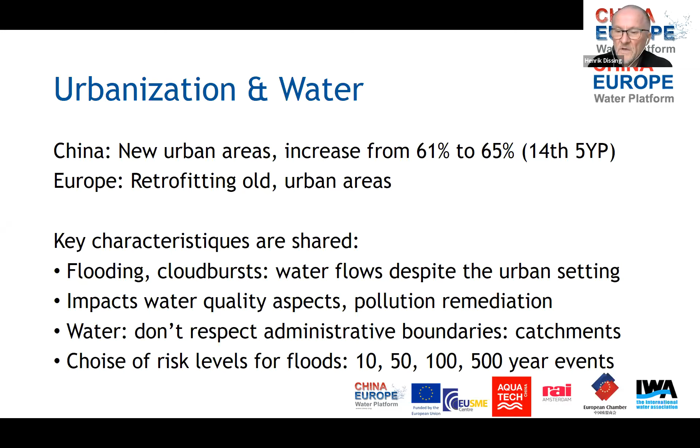The third thing is water doesn't respect administrative boundaries. It comes from the entire catchment. It goes across provinces, district, or city boundaries. And finally, an important detail is whether it's in new or old settings, you still have the very difficult choice of getting the risk level right. Should it be 10-year events, 50, 100, 500, or even 1,000-year events you will have to deal with?

We will come through a number of presentations. We will end up with a roundtable and some of the questions for discussion. Some of the questions for discussion are quite simple. Do we have solutions which are sufficient on all parameters to deal with the challenges we're facing and to cover the benefits which are also part of the coin? What do we do to cover all related water management challenges? And here again, I'm thinking about how dealing with flooding matters will eventually also have a huge water quality aspect.

What to do with having solutions which can be scaled up, where it's not a matter of projects and special efforts, but something which is handled in a manner where all cities eventually, because most cities are subject to flood risk, will take this on board in an operational manner. Not only the largest cities with millions of inhabitants, but also when we get to tier 4, 5, 6, whatever. And when it comes to financing, how to find mechanisms for this which are not just based on grants and government budgets, but which are somehow a more organic way of financing and economics.

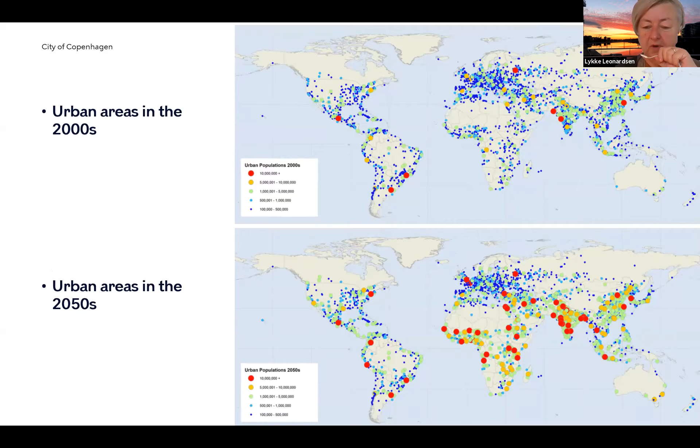But you also see that a lot of these cities are at extreme risk for growing heat in the city. That is a challenge to many. There's also a risk in many cities for water availability, actually not having sufficient amounts of drinking water. And a lot of cities are also at risk for coastal flooding. And in the project I'm working on at the moment, we are also looking at the risk of inland flooding, but I don't have any illustrations of that as yet. But it is also a problem that many cities will face in the future.

So cities need a joint voice to raise these issues on a global scale. And C40 or ICLEI can be that voice. I mean, there are lots of climate negotiations and finance issues taken at UN level or at national level. But it's the cities that actually have to implement the solutions, and they're the ones with a direct responsibility towards the citizens and the safety and economic situation of their citizens.

So an organization like C40, we are working at two levels. We have the global policy levels, looking and trying to raise the voice of cities on a global scale. What are the climate change related challenges that cities are facing? What needs to be done in order to assist cities in overcoming this issue?

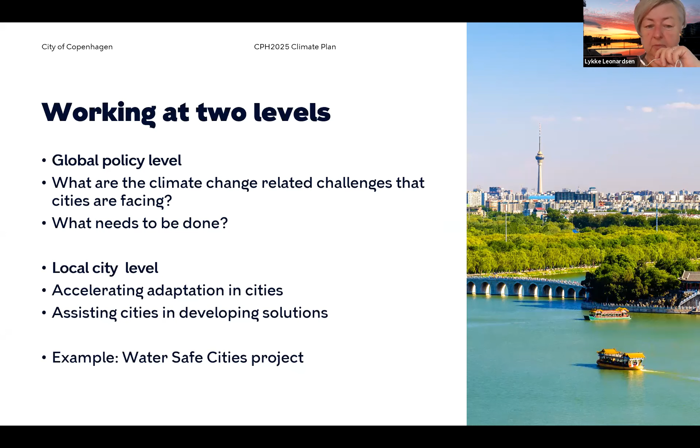But we are also working at the local city level on accelerating adaptation in cities and assisting cities in developing solutions. And one of those examples is actually the Water Safe Cities project that I'm working on, where we are offering assistance to a number of C40 cities on water-related climate change challenges. Because a lot of cities are facing the same issues, and we do not all need to invent the wheel. We can learn from each other.

And that's why an organization like C40 plays a major role in accelerating climate change adaptation on the city level, simply by sharing solutions. Solutions that fit in Copenhagen might also fit cities in China or cities in India if they are adapted to the local level where they are going to be implemented.

And another thing that an organization like C40 can also assist on is overcoming barriers. As Henrik mentioned in his introduction, adaptation has to take place at a local regional level. We need data. We have financing and insurance being an issue, and we need a lot of innovation to move forward.

And if you look at it from the top, saying local versus national level, there's no such thing as administrative boundaries when it comes to climate change. Water flows where it wants to flow, heat spreads where it spreads, and it doesn't have anything to do with whether you are in one municipality or another. So local problems very often call for at least a regional solution, maybe even a national one.

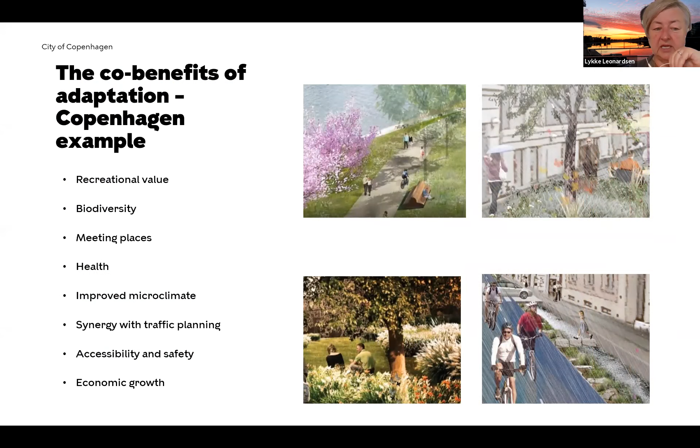So what we are looking at in the future is what I call transformative adaptation. And it's a type of adaptation where you're not just looking at solving the climate change adaptation issue, but actually transforming the city, contributing to other goals. That could be on greenhouse gas emissions, social equity and biodiversity, the environment, mobility, and housing. But it needs a strong focus and a lot of coordination in the planning and implementation phase.

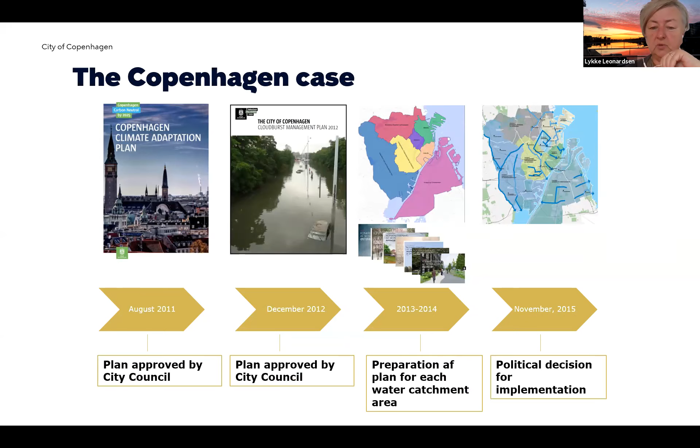We have tried doing that on our cloudburst management plan in Copenhagen. I will not go through this, just show that over a 4-year period, we went from just having the first plan into actual implementation. And we are dealing with 2 main risks, and in this plan, focusing on one, that is the risk of heavy rains, heavy cloudbursts, but we are also in the future looking towards rising sea levels being a risk.

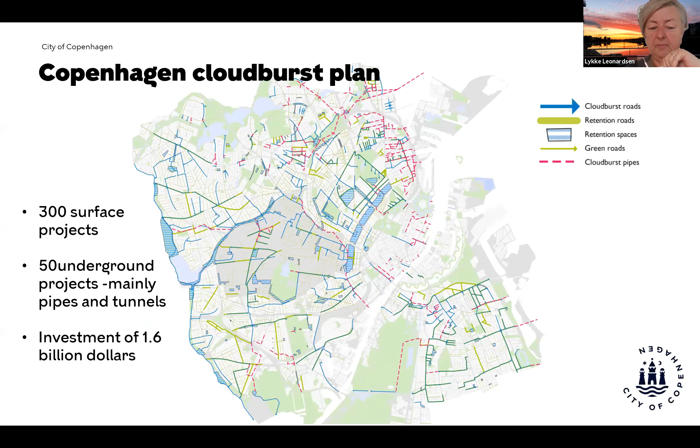Our cloudburst plan has 300 surface projects, and it will transform the city completely over the next 20-year period, and is also the backbone of a lot of our urban development in the city. And it's not just the future for us. We had a huge cloudburst in 2011 that cost us an awful lot of money, $1 billion in damages, but it also gave an image of how the future can be, and it underlined the need for action here and now.

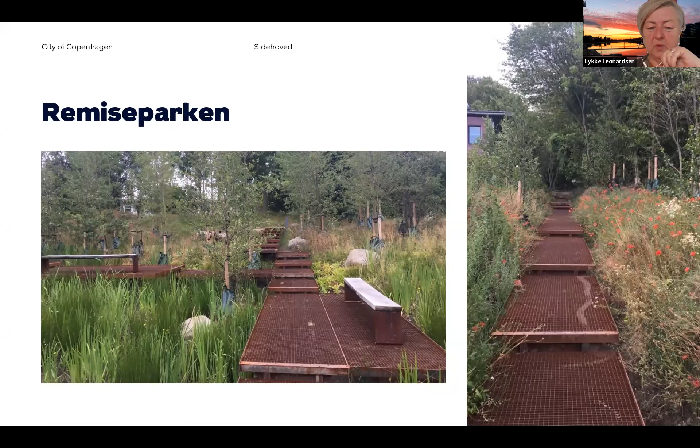At the end, I'll just show you a few examples of projects that we have implemented. This is St. Kjeld's Square, where we have doubled the permeable surface, planted 600 trees, and it's all of a sudden become a green living area in the city of Copenhagen. Skandiagade, and a park where we will use the entire park as a flooding area to hold back stormwater in case of heavy rains. And Remiseparken, also a project. And all of these are actually in areas where there are also social issues, so they're also helping improve the local neighborhood. Thank you so much.

Thank you very much, Lykke, for this comprehensive, fast-forward covering of the climate change adaptation globally and in Copenhagen.

While we're waiting for Chen Lichun to be ready, just one question, Lykke: how many members does C40 have in China? I don't have the exact number, but there's a growing number of C40 cities in China, including major cities like Guangzhou, Hong Kong, Shenzhen, Beijing, and Shanghai. I can check it up and post it in the chat later.

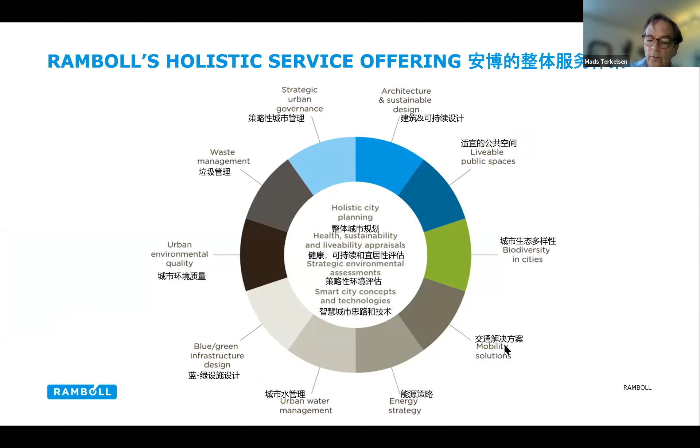Our typical topics that we work with are classical engineering topics like buildings, transport, energy, environment, water, planning, and urban design, and we also have management consulting. We try always, when we start a task, to combine all the different expertises into holistic and integrated solutions. That was how we entered this urban blue-green market, so to say. We started to combine, every time we had a project - either wastewater, water, flooding, landscape architecture - all the different topics into these projects.

We started out in Denmark, and from Denmark we took this and some other international projects as well. With the help and support of the China-Europe Water Platform and also the Sino-Danish bilateral cooperation, we were able to bring our projects and products to China, working with the Chinese, who are very innovative, and introduced for example the sponge city concept. We were able to increase our market share internationally after being in China. We are still in China and growing in China, but we are growing because of the projects in China, and we are growing very much in the rest of the world as well. That actually comes down a lot to the China-Europe Water Platform, because when we moved out to the market in China, they were already informed on the basics of the concepts, so we didn't have to start from scratch. They had quite a lot of knowledge when we talked to the stakeholders, so we could fast target the real issues and problems.

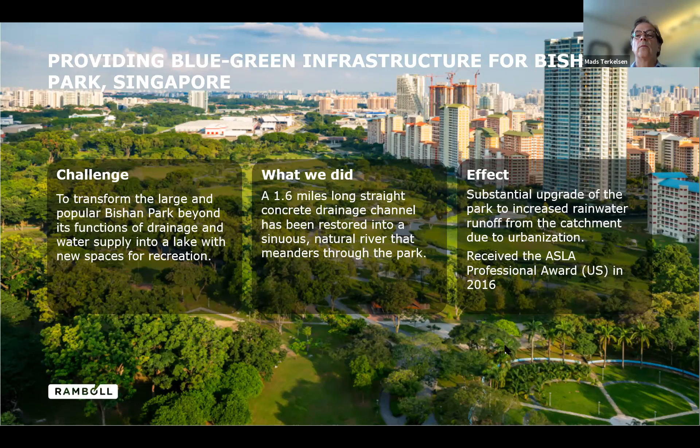We also worked abroad, and I have one example, because Copenhagen is not relevant maybe for Beijing, but this project is more relevant - we applied some of our technologies from our Danish project into a large project in Singapore, which is actually very similar to how we see things in China as well.

This project was a park with a flooding canal in the middle, and the water in the canal, in the lower picture, was black odor water. So what we did was remove the canal and make a larger depression, so the capacity for handling flood water was increased, and at the same time we applied natural wetland systems and root zone treatment systems, so we could maintain high water quality so people could actually use the water. We installed mobility features and activities, creating this area space that increased the value for the neighborhood immensely, and also the prices of the houses around went up.

And then this is just one example from China that we did. This is based, among other things, on the contacts we got through the China Water Platform and the Sino-Danish cooperation, and also being able to present especially the case that I just showed you from Singapore. This is a cultural park in Tianjin.

The thing here is that they wanted a park that was not at risk of flooding, because there have been flooding events in Tianjin, so it's a known risk in the area. So we made this park, including a lake and some green areas, also some mobility paths for light users, like pedestrians and maybe some bikes as well.

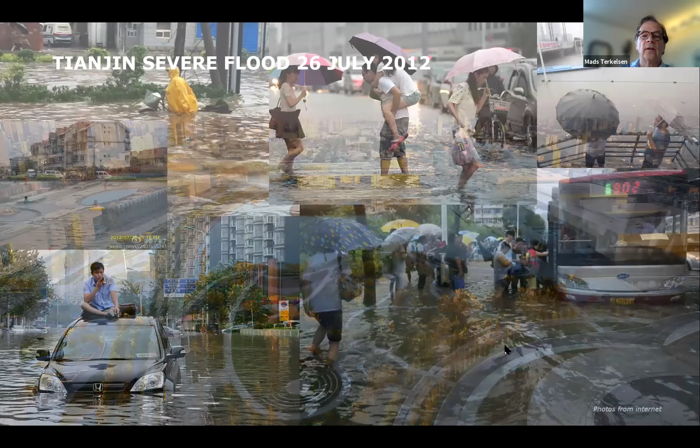And we made it so that it could take care of the flooding, but also served a lot of other purposes, including recreational areas and transport. This is an example from 2012, where the rest of Beijing and Tianjin looked like this, but in the park area it looked like this. This is sort of a proof of concept, and it's not even reached the maximum level yet, and it's not nearly reaching the construction and the houses around.

Working with China put on some extra layers, because Chinese authorities and the government are very innovative in their approach to solving problems, and we really benefited from that. We of course work with water quality, water scarcity, flooding, urban design, landscape architecture, recreational areas, mobility, activities, local microclimate, all values.

And then we really benefited from the sponge city concept as well, which is actually more or less the same thing, but explained in a clearer way. It's a good way of explaining it, and we brought that further out internationally.

And this next project has nothing to do with China. It's a totally different setting. It's from a poor country in Western Africa. But the reason I bring it up is this is what we work with. We started in December last year, so we are working on this now, and this is exactly the same kind of project.

It's a drain that fills up with waste and gets blocked, so it doesn't work as a flooding canal. So we change it, and we use all these different expertises and combine them into this solution.

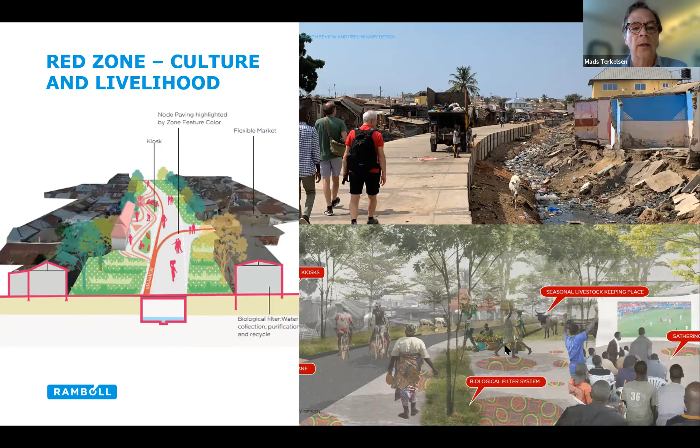So these were my words. Thank you very much.

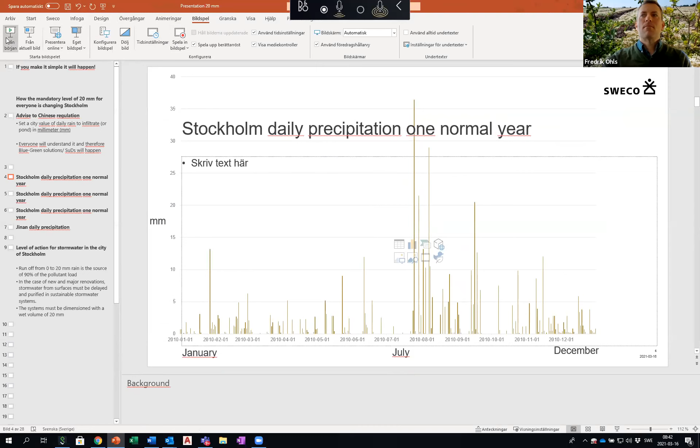It's not a problem, this I've already told you about, you make it simple. Runoff is pollution, you remember? And this is Stockholm daily precipitation, one normal year.

Do you see my screen now? Yes, we see your screen, good, perfect.

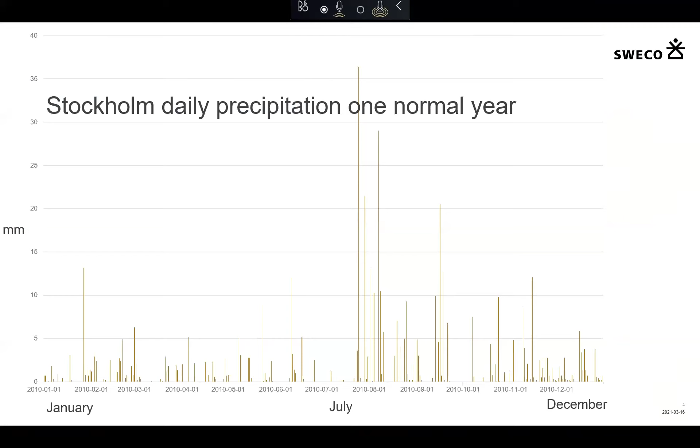January to December. And 20 millimeter is 90% of the annual runoff volume in Stockholm. This is unique for every city, so you just calculate that for your city. And then you will know - this is a coincidence, but this is 90% of the annual pollutants in Stockholm if you infiltrate it.

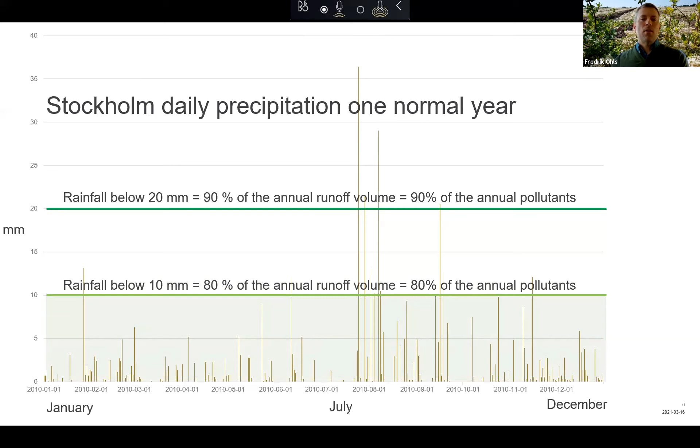You can also choose 10, to have 10 millimeter in Stockholm will be 80% of the annual pollutants. And then we implement it into blue-green infiltration that will bring us even cleaner water in the future when our city is growing very fast - okay, not so fast as in China, but one of the fastest growing cities in Europe.

So this is what we call the level of action for stormwater. And everybody knows it - every private property owner, the municipality, every actor in the building process in Stockholm.

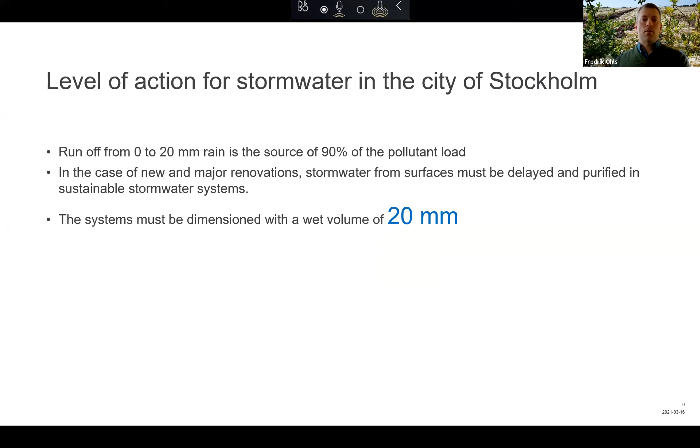So here we have some examples. This is after this level of action. As a private property owner, you know you need to take care of 20 millimeters. So then you get a lot of green roofs, you get a lot of green courtyards, looking like this. And like this.

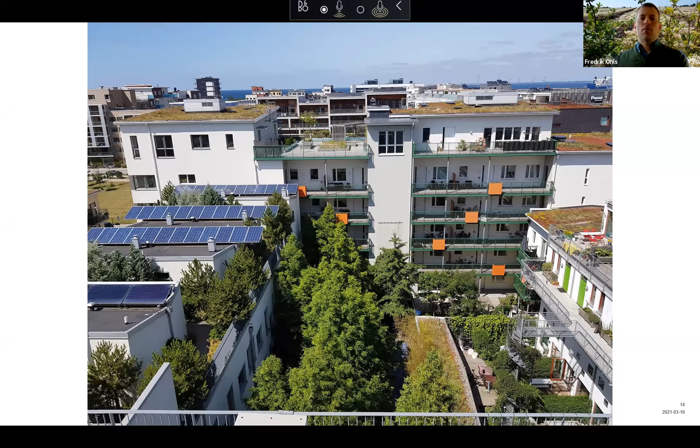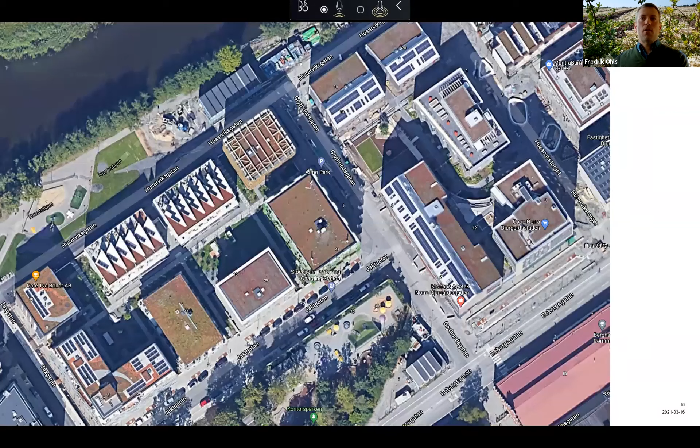And this is not only for the property owners, it's also for the municipality or the pavement. You need to take care of 20 millimeter of rain. So you take the 20 millimeter times the hard top area and maybe a little reduction factor, and then you store it in rain gardens, trees, structural soils, and dry ponds. This level of action, 20 millimeter, is now making a revolution in Stockholm, because you need to do these kind of local decentralized solutions everywhere.

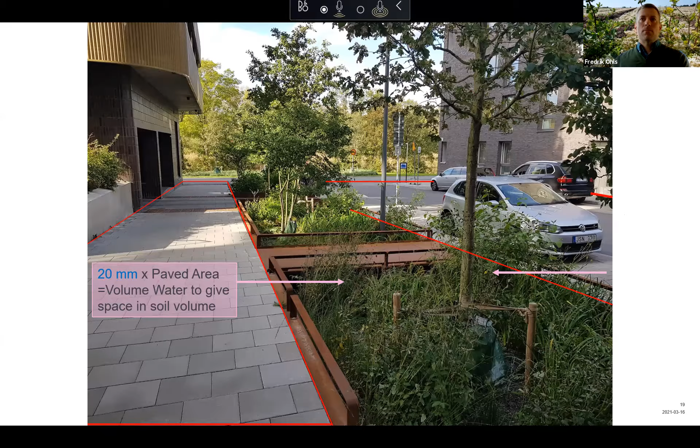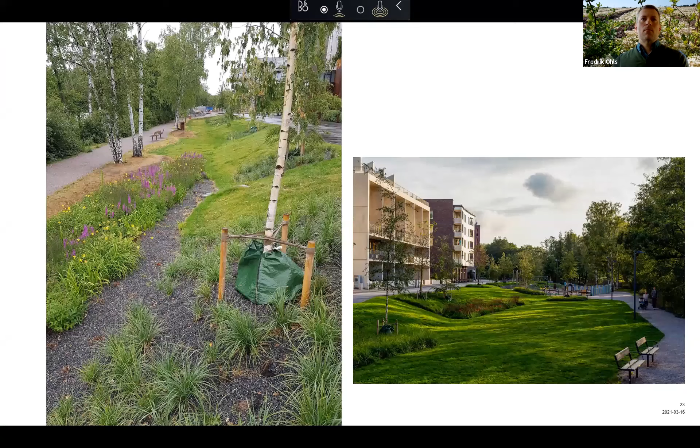So my advice is to calculate the millimeter value - it's something about 10 to 25 millimeter. Stick to it, advertise, implement, and follow up. And I know in China you have annual total runoff control rate, but as far as I see it, it's too complicated for us consultants. When we come to a new project, we don't know what the limit is. Just give us a millimeter and we will make it blue-green.

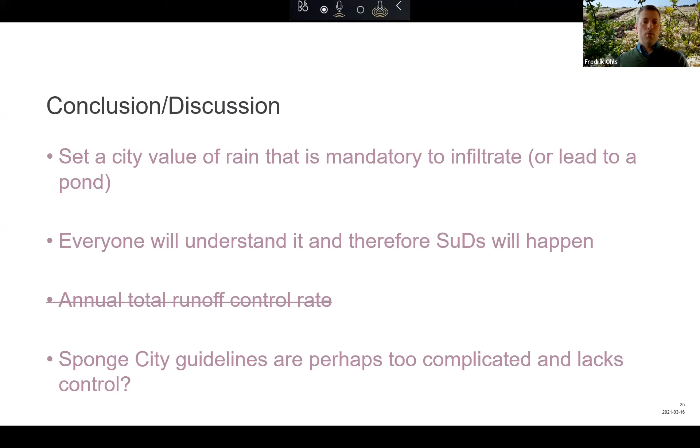Thank you, and that was everything from my presentation.

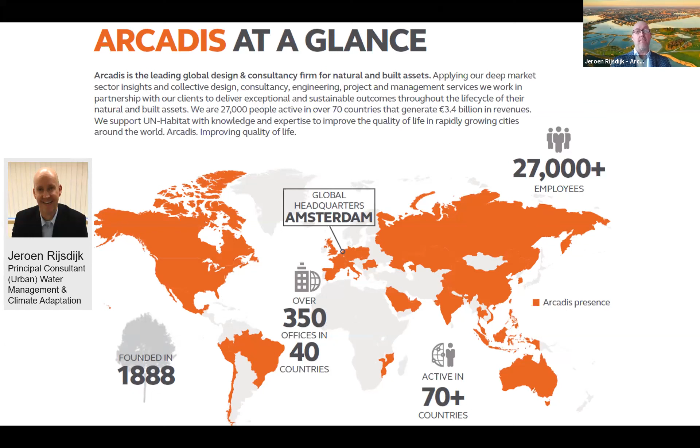My name is Jeroen Rijsdijk. I work at Arcadis, a global design and consultancy firm with a presence in over 40 countries, active in 70 countries, and also very active in China. I've been in China myself 12 times in the past 5 years, and most of my time I spent in the city of Wuhan.

Arcadis has a big presence, and we have our mission statement, which is about improving the quality of life. We've been working on that since 1888, and a lot of other companies joined Arcadis in the last decades. So we've become a big global firm working on all sorts of nice projects.

One of those nice projects I want to elaborate on is the project we did in Wuhan for a local project developer, which was developing the Hankou Commercial International Business District, also known as RG27. This area of approximately 3 square kilometers had a really high ambition about developing.

Here you see some images from the architects. They had a really high ambition, but also a lot of difficulties to address. They were situated at the waterfront of the Yangtze River. It was a flat area with low soil infiltration possibilities, intense underground buildings, and very hard conditions for the Sponge City program.

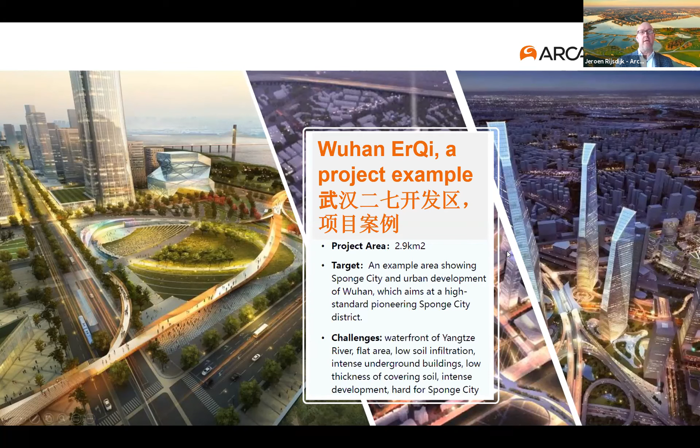So we helped this project developer make a couple of plans to implement the Sponge City ideas into this development. We made a Sponge City master planning, a Sponge City general planning, a specialized planning, a design guideline, and we also did assessments on projects that were already designed.

The idea of this was to help the designers, the local architects, the landscapers, translate all these Sponge City ideas towards a Sponge City design.

And we also added something extra. That extra was that we looked beyond Sponge City criteria and looked at how to make the area also climate resilient, because Sponge City only sets targets for a certain amount of water capture.

And it will always rain more extreme than that at some point. So what do you do if you build your Sponge City area and the event that occurs is more extreme than your Sponge City criteria?

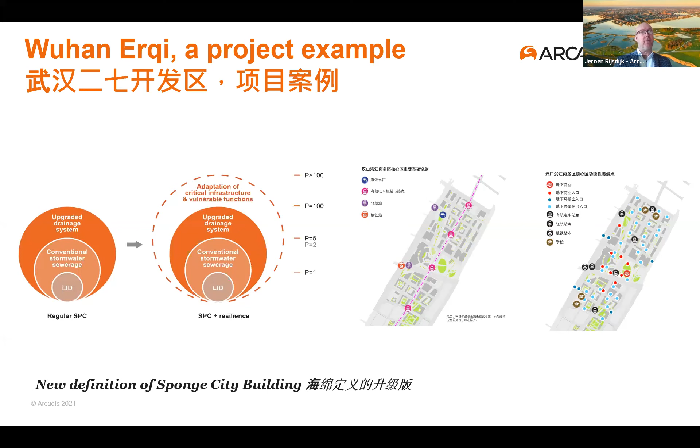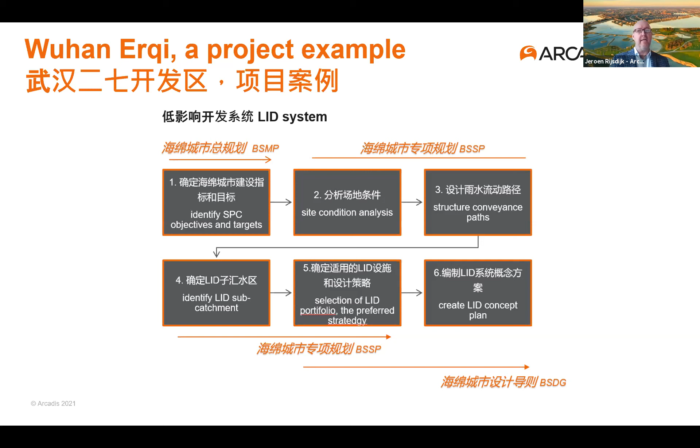But we also introduced the resiliency system. With the resiliency system, we looked at totally different types of measures for making the area climate resilient for the really extreme events.

And of course, these really extreme events happen in Wuhan just as they happen in other cities. Being resilient doesn't mean there will be no more flooding, but it stands for the ability to minimize the damage and maximize the efficiency of recovery. That's really the idea that we implemented.

And of course, in China, you have to defend your reports to an expert board, an expert panel. The experts from the universities and from Beijing really understood that yes, you have to do this as well, on top of Sponge City.

So what we did in implementing all these reports and this way of working, we also did some cost benefits analysis on the performance of different types of measures, helping to make it more clear for the local design group how to make their designs.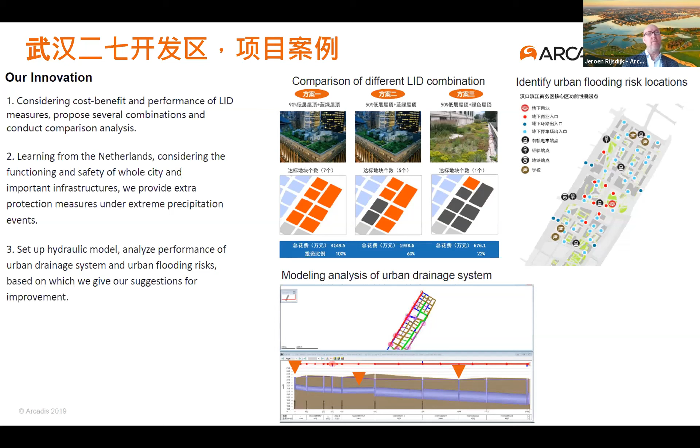Okay, thank you. And the last part was that we also made the hydraulic simulations to help the design groups to make the right decisions. And here's an area where we looked at the Central Park, and in the Central Park, we helped to translate again all these criteria into the design criteria and helping them with the self-assessment and the government assessment.

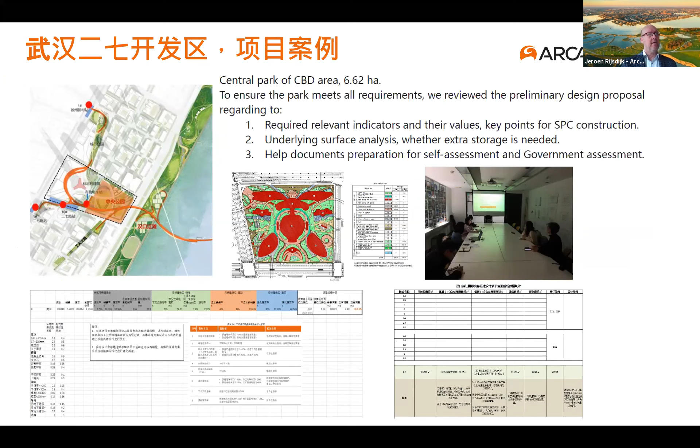So this was really a nice adventure in helping the local design group, the local project developer, in implementing this ambitious planning. So thank you for your attention.

Thank you very much, Jeroen. What I heard you say was that if the official sponge city criteria had been followed, then the damages of a huge cloudburst or flood event would have been quite severe. Is that correct? Yes, of course, because the sponge city criteria only captures a relatively small amount of rainfall.

And if you look at an extreme event that would occur maybe once in every 100 years or 200 or 500 years, those events are occurring at this moment, then the sponge city low impact development designs will not be sufficient to prevent extreme damage and extreme disturbance of traffic and people. So that is what we introduced. Look also beyond the sponge city criteria, look at the resiliency of how you design the streets and how you design the buildings.

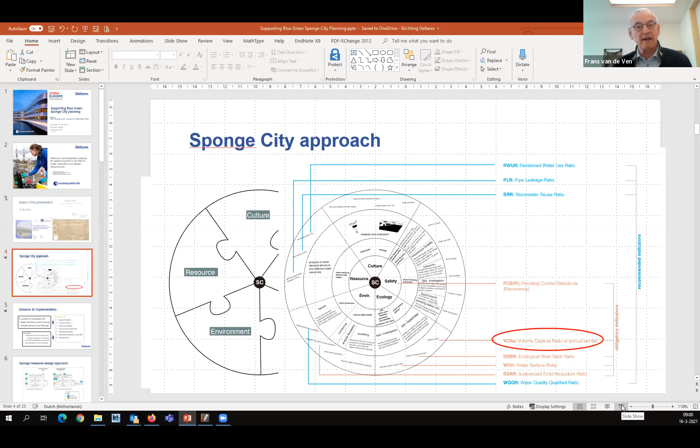Frans? Yes. Excuse me, we don't see your screen. Really? Because I see. That is strange. Let me try to share again. I'm sharing my screen now. It says on the machine, but okay. Yes, yes, there it is. Okay. I didn't move anything, but as far as I can see, it's on presentation mode now. I'm sorry. Sorry for this disturbance.

I'm working with the institute called Deltares, an independent institute for applied research in the field of water and subsurface, focusing a lot on the Netherlands and with a lot of Dutch expertise, but working worldwide, and currently planning to open an office in China, but due to the Corona crisis, that has been delayed substantially.

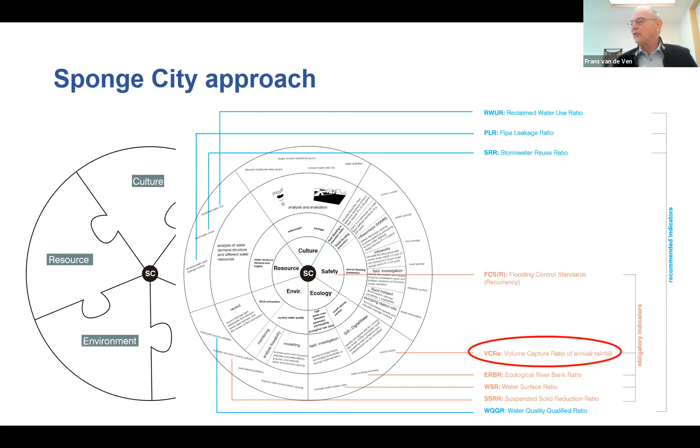Coming back to the sponge city approach, the sponge city approach addresses the problem of urban water management from 5 perspectives: safety, culture, resources, environment, and ecology. And as was mentioned before, it sets all sorts of criteria and indicators for having a decent sponge city, including that famous indicator called VCRA, the volume capture ratio, as we all know.

But what we did in the past is we started comparing the sponge city approach with 2 approaches, one from Australia and New Zealand, the water sensitive urban planning approach, and the Dutch climate resilient city planning approach. As a result, we found substantial differences in principles. For example, the Dutch never shift problems principle was not applied in the sponge city.

Another big thing was to bring the relevant stakeholders around the table. So the co-creation of planning is an important issue, and design for resilience, as Jeroen said already. That is another issue. But to do so, we had to strengthen a couple of issues in the sponge city approach. That is the flood hazard assessment, the storage capacity assessment, the drought mitigation assessment, and the groundwater system analysis.

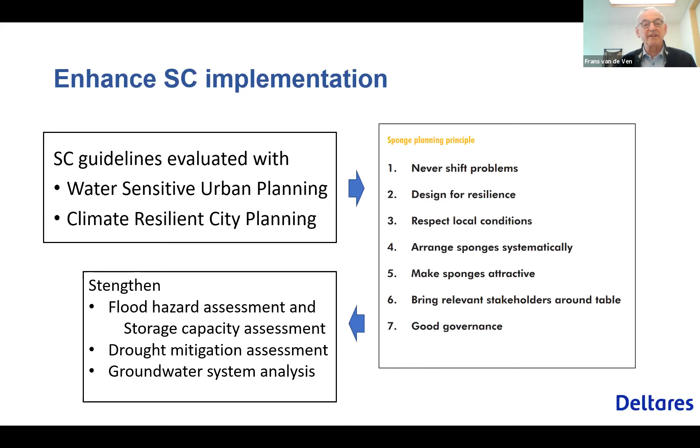And basically, that's what we did in a couple of projects, as we will see in the next steps. We defined a new approach to planning and design to get more co-creation, co-design into the process. But moreover, we started working on tools that could help us to define that sponge city capacity and to help us select the best measures to come to co-creation.

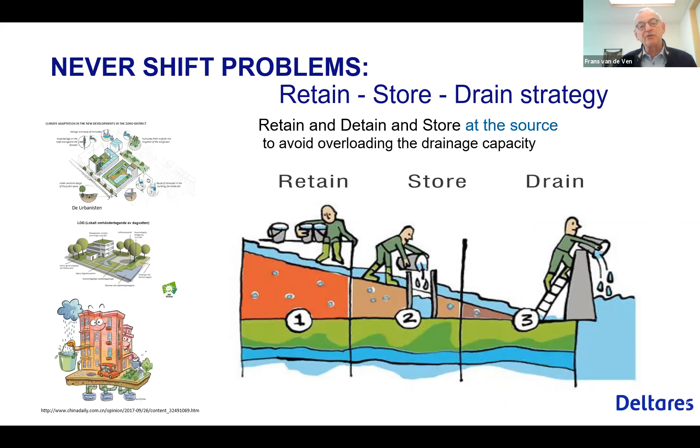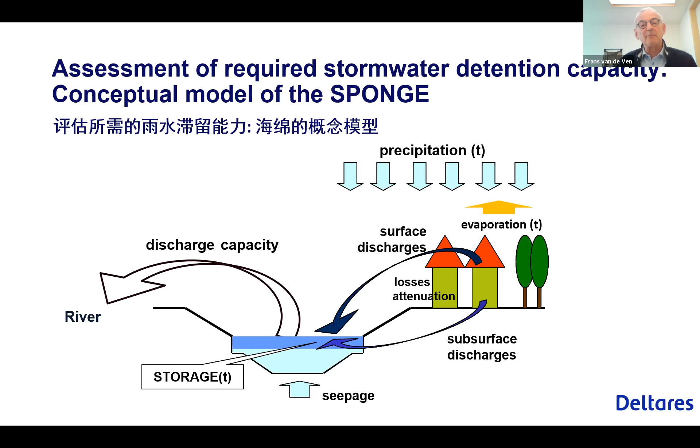If it comes to designing the standards, and in line with what Frederick said, we have to retain and store the water rather than drain the water. And we developed a process on designing the size of the sponge in a better way. And we did that using the so-called water balance model. And with that water balance model, we were able to define storage discharge frequency curves.

And in these curves, you can see the relationship between the discharge capacity that is acceptable for the downstream river part, which is limited, of course, because we cannot discharge infinitely unless we would like to flood our downstream neighbors, and the required storage capacity, whether that is 20 millimeter or 60 millimeter like they use in Amsterdam, which of course depends a lot on the local climate. So we have to define this capacity for every city separately, and that's what we did basically for, well, this is an example from Nanjing, but we did similar studies for Qinghai and other cities in China.

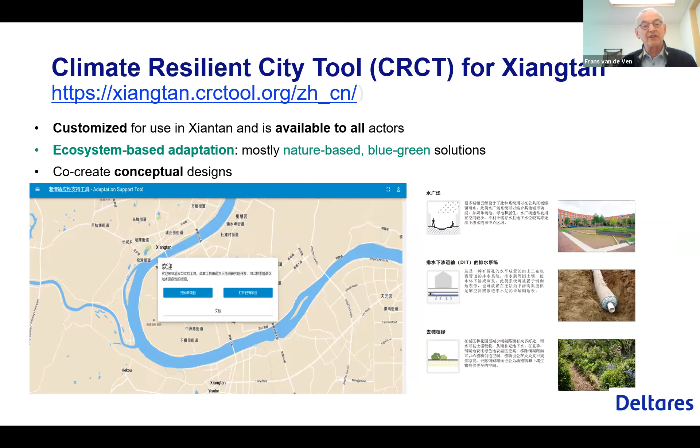Then the next step is, once you have defined these values, you can start co-design. You have to bring all the related experts together in one room, and you need a tool to support that planning process, to co-design that planning process. And that is what we made with the Climate Resilient City Toolbox. The first version was made for Xiangtan under contract for the Asian Development Bank. And basically, the tool helps to support ecosystem-based adaptation using these blue-green solutions as we try to plan these in the urban environment.

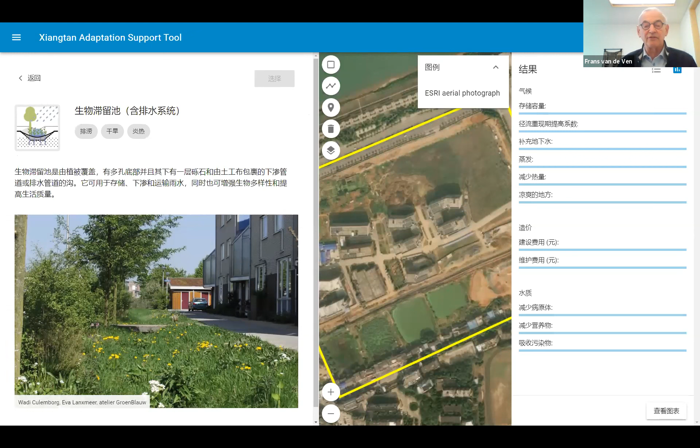Once you enter the tool, you will find a lot of different blue-green solutions you can choose from, and you can apply these solutions in a planning way in the toolbox. You can find additional information on each of these measures. It's all available in English if you like, but it's also available in Chinese. And what the toolbox does, it gives you estimates of the performance.

It gives you estimates of the storage capacity that is realized, that 20 millimeters that Frederick was talking about, or the 60 millimeters or whatever, a return time factor, the groundwater recharge, but also indicators on water quality improvements, the suspended sediment reduction, nutrient reduction, etc., and a first estimate on costs of construction and of maintenance. All first estimates, because we are still in a very conceptual phase of design, but it gives you the opportunity with the team to draft alternatives and to compare alternatives.

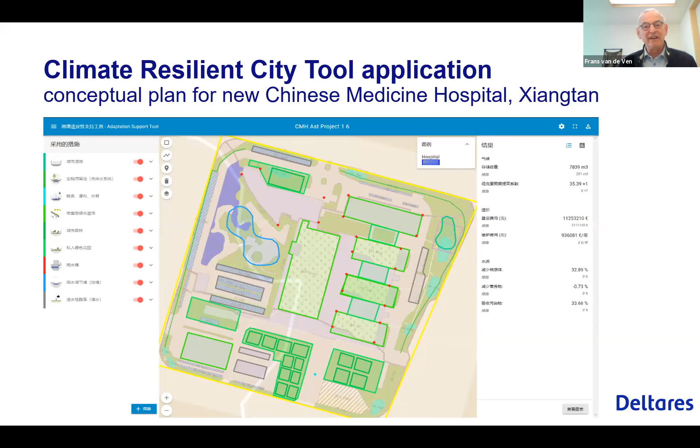And that is how we, for example, made this plan for a new to build Chinese medicine hospital in Xiangtan. The design of the buildings were made, but the layout of the terrain, the campus around it, we implemented a lot of blue-green solutions there in order to create sufficient retention capacity there.

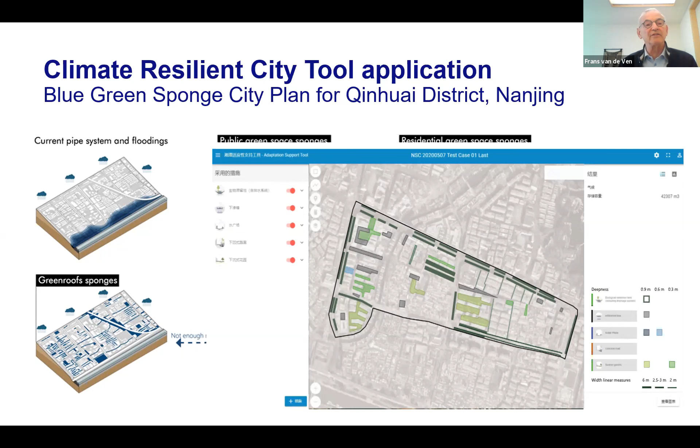Well, a similar analysis was done for the Qinhuai district in Nanjing, where there was a priority list of interventions defined as a first step. And with the toolbox, we were able to find out which measures could be implemented where in the area. And we could define sort of a priority list of interventions to see what can be done in each of these ways.

Which brings me to the conclusion of my presentation, and that is, first of all, that Blue-Green Cities development is a complex learning process for all of us. It's learning. It is city-to-city learning. It's expert-to-city learning, and so on. It requires a comprehensive approach to the urban water management system, including groundwater, including space, including water quality, including health, etc. And it includes water governance.

Henrik already spoke about the financing. Well, I think it's more than the financing. It's also the policies, it's the regulations, it's the capacity building in the city, and so on. But if you want to achieve these multi-factor benefits that we all are convinced of that blue-green solutions can bring, we need, first of all, to plan for multifunctional use.

But that multifunctional use also requires multi-stakeholder planning. All stakeholders, all experts are to be involved in the planning process. And supporting tools like the Climate Resilient City tool are needed to support such a planning process, or that urban water balance model to define how much sponge capacity you need.

Then the multifunctional design requires lots of data and requires data sharing. And data sharing is indeed a very touchy subject in China. And I think there are some improvements to be achieved in the near future. And last but not least, coming back to that complex learning process, I think training and education helps to change the siloed culture of these organizations.

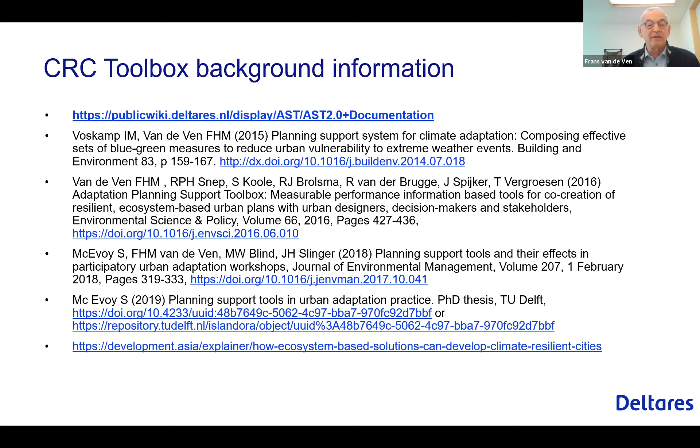And I think that we in the Chinese-European cooperation are particularly suited to provide that training and education component as a part of the whole innovation process that we are going through at this very moment. But if you want to read more about the toolbox, I included a literature list of published peer-reviewed articles on this stuff. And for the moment, I would like to thank you for your attention.

Thank you very much, Frans, for this tour de force through your toolbox. We'll come back to some of the topics you have mentioned with multi-stakeholder involvement, co-creation, and siloed organizations, and so on, when we get to the roundtable. Now we will move on to our next speaker, which is Simon Padoan, who will take us particularly to a case in Venezia, as far as I recall. Simone, take it away.

Thank you, Henrik. Yes, of course. Today I'm going to talk about a specific topic that is related to what we can do in planning a new development of a very contaminated site inside the urban area with a specific and very delicate environment in the water. And usually, you should see my presentation.

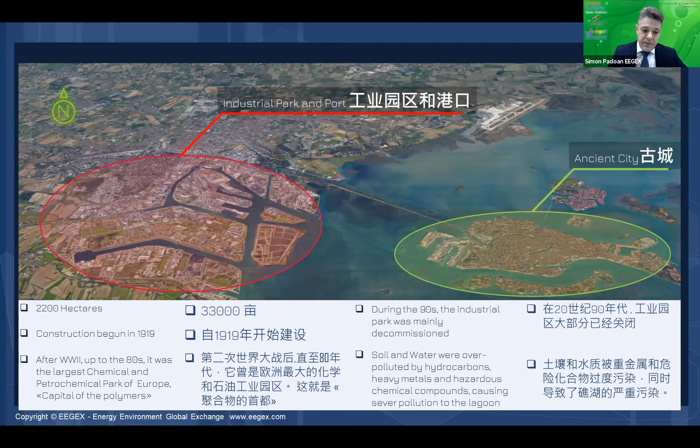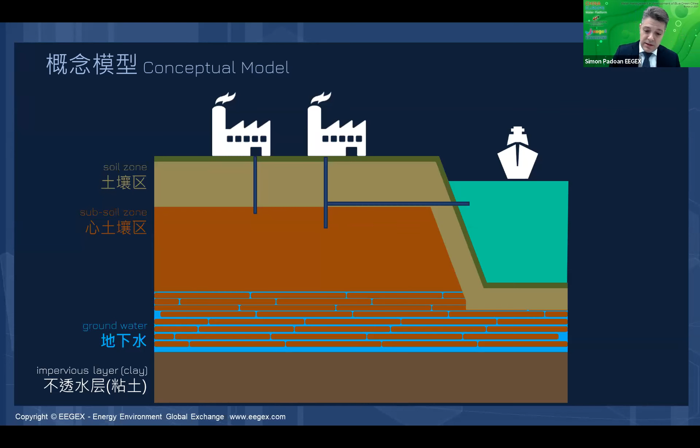The problem is that the first thing that you have to do is to stop the flow of contamination that runs with the water. During time, the contamination comes down to the soil, to the subsoil, and when it encounters the water, that's the real problem, because the water transports the contamination to other places. So it is not only a polluted area, but it is also a polluting area. So you have to stop the flow. You have to stop the flow, putting down the walls attached to the impervious layer, and in this way you stop the flow of the water.

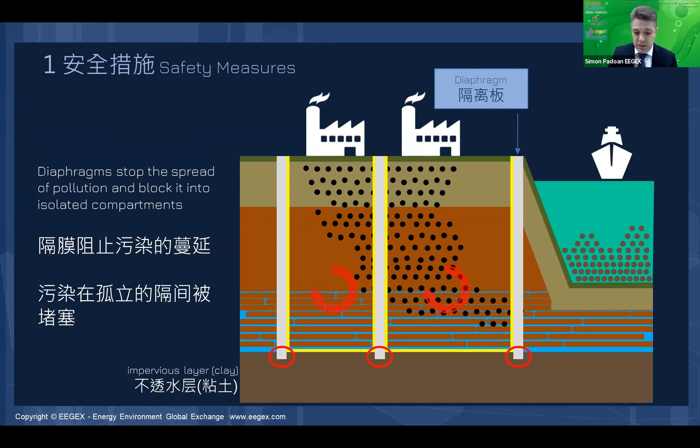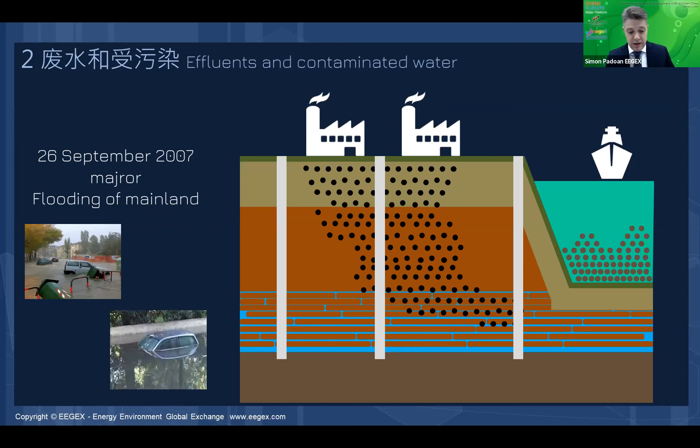In this situation, in 2007, we had a major flooding. It was 300 millimeters of rain in a couple of hours. And the main problem is that the water was not flowing away, so we had the flooding in the mainland. So we understood that we had to do something very quickly. We decided to do an integrated system to deal with different issues at the same time: how to deal with the contaminated underground water, how to deal with the effluents and the wastewater of the factories, and how to deal with the stormwater and the rainwater.

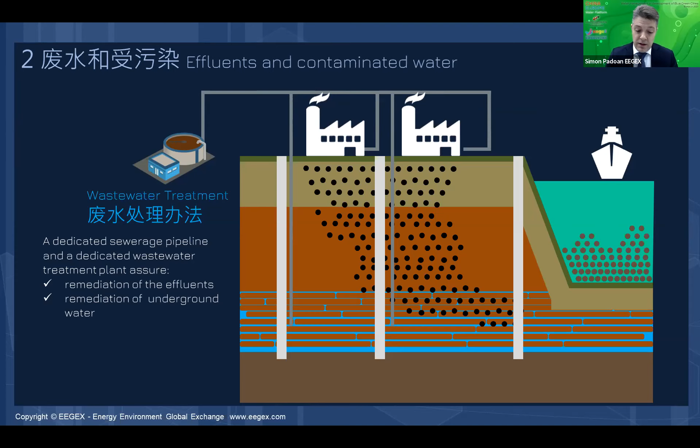So the first stage was to establish the backbone of a pipeline to take the water from the factories, from the contaminated underground, and the rainfall water, and we brought that to an integrated wastewater treatment plant. This plant is also designed to clean the water and reuse the water. We pump the water back to the factories, for example for cooling systems, but also for industrial processes. So in this way, we loop the water and we don't take any more fresh water from the environment for industrial uses. At the same time, we can regulate the flow of the water inside the industrial park, and that also positively affects the whole urban area.

This system, it was not easy to understand how to do the system, the economics of the system, the financing of the system. It took a lot of time, a lot of negotiations, but now it is working. It is a treatment facility of 160,000 cubic meters per day; more than 1/3 is municipal wastewater, and the remaining part is industrial wastewater and rainwater. It took an investment of almost 200 million euros, and it is a public-private partnership. The investment capital is fully private, with public warranties of minimum turnover each year. Actually, the annual turnover is around 22 million euros and the operating costs are 19 million euros, so it has its own economic sustainability.

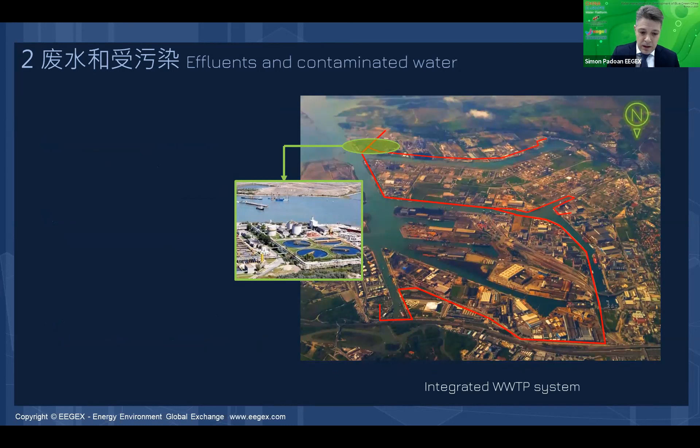And all the factories have to deliver the effluent as is. They don't have to do pretreatment because everything is dealt with inside the treatment plant. This is also very important for the factories because in this way they pay less for environmental protection. Here you can see the picture of the industrial park with the backbone for the sewerage system, and this is the backbone that brings the clean water back to the factories. On the left side, you can also see the finishing section of the treatment plant. It is a very large constructed wetland, meant not only for the finishing of the water, but also for balancing the quality of the water in the lagoon.

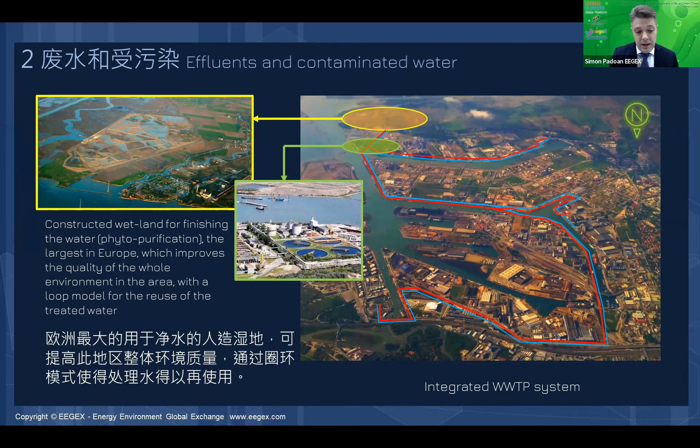So after that, you can actually deal with the soil remediation, with all the planning of each section and each lot of the area. We know everything that is happening, from the detailed surveying to the actual works for the remediation. And these are the pictures of some of the works. So this is the experience of Venice. Thank you for your attention.

Thank you very much, Simon. I could imagine that you could have given us a presentation lasting quite a long time with such a huge area to be covered. Thanks for this presentation, which gave us the dimensions of scale of areas and also of when climate change adaptation has to be taken into account, or remediation problems solved in advance.

We will move on to our next speaker, Carina Almeida. Are you ready? Excellent, Carina. Thank you.

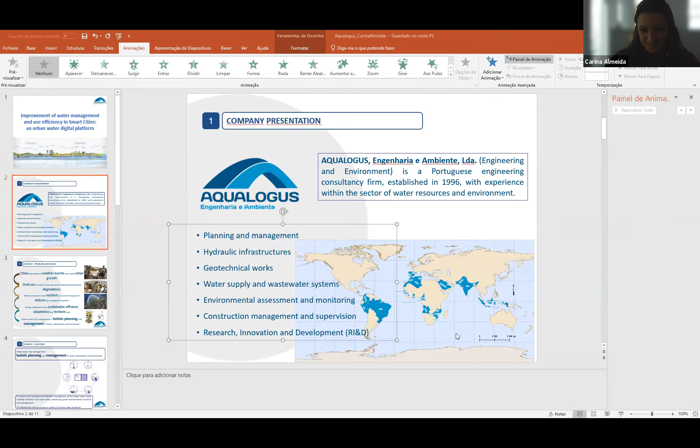My name is Carina Almeida, I came from Aqualogus company. Aqualogus is a Portuguese engineering consultancy firm since '96, with experience in water resources and environment in Portugal and in more than 20 countries around the world.

Hope in the near future China will be on our map in blue color. The company embraces many different fields of activity: water supply and wastewater systems, environmental assessment and monitoring, construction management and supervision.

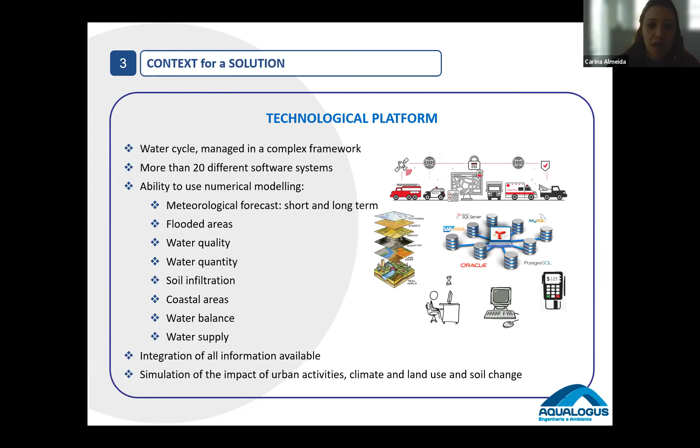Coastal areas, among others. So mainly the possibility to simulate and test the impacts of urban activities, climate, and land use or soil changes.

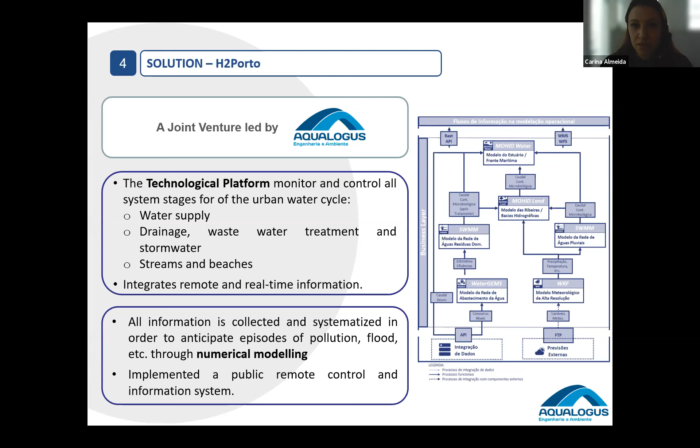I'll present the H2 Porto platform. This platform was a result of a joint venture led by Aqualogus, focused on monitoring and control of the urban water cycle, integrating all information in order to anticipate floods, pollution events, etc., using mainly the numerical modeling approach. It integrates several types of models to simulate the whole urban water cycle in the city of Porto.

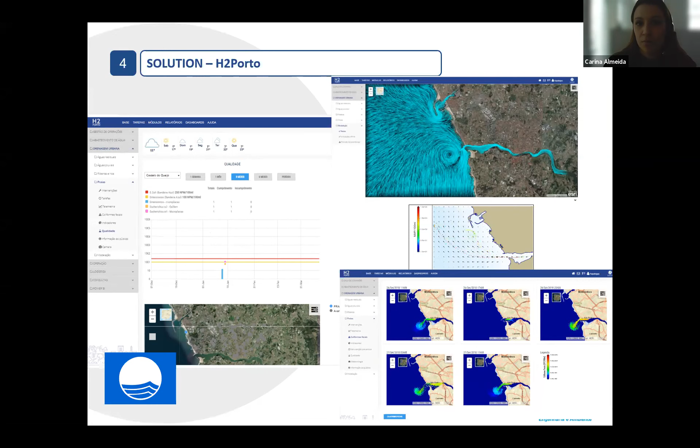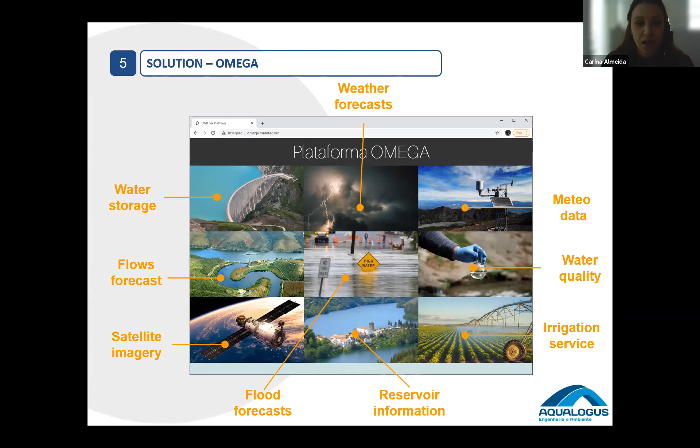This platform can be applied at several basin watersheds or at local scales.

To conclude this short presentation, Aqualogus aims to apply unique tools for integrated water cycle management, moving from reactive to proactive management, especially due to climate change projections. We aim to simplify access to different modeling results in order to adapt cities and increase our resilience. So thank you very much.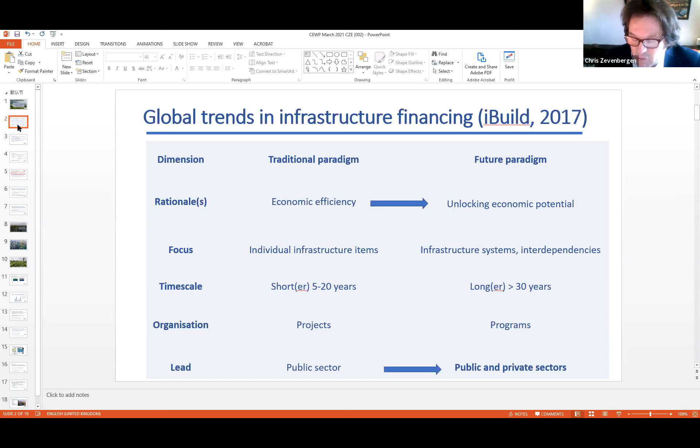So what is public-private partnership, and why are we inclined to have those? One is that they make projects affordable. Private financing is important and is needed. It also will help achieve better value for money over the lifetime of the project. We will adopt and include the private sector's experience and knowledge into our projects. And last but not least, it will also better utilize the social and economic benefits of our assets.

And I will come back to that within a minute.

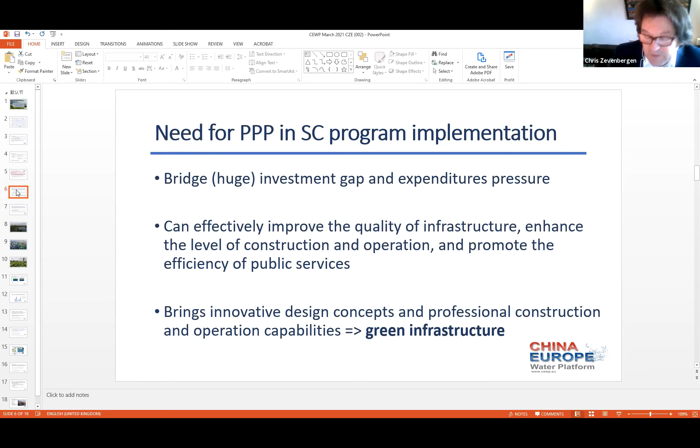Why are these innovations so important? Because we are lacking a lot of, as Frans van der Ven already mentioned, knowledge and understanding and clear guidance on how to implement green infrastructure. Now the private sector is well placed to give a hand there.

Green infrastructure, as we concluded in our Lot 3 CECoSC project, reduces gray infrastructure requirements. So green infrastructure can be used to blend with existing gray systems. It's not replacing, but it is blending and adding qualities to the existing systems. It also adds qualities in terms of additional benefits, as mentioned by previous speakers several times, and it enhances the redundancy of the systems, which is the resiliency of the system. So green infrastructure has three functions, as indicated in this slide.

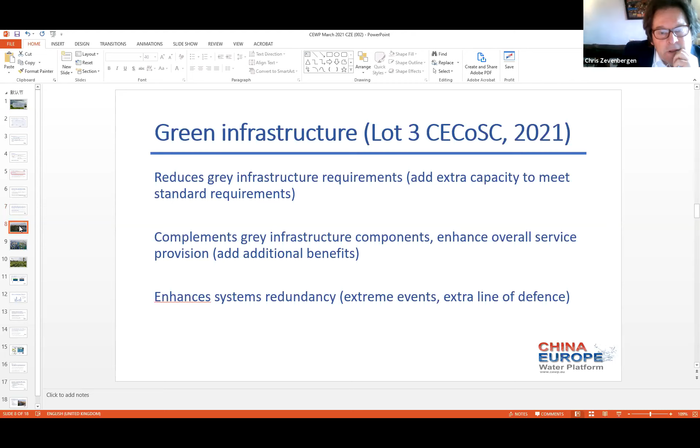The question is, of course, who is benefiting from these investments into green infrastructure, and who is paying? You see there's a discrepancy there: those who are benefiting are not paying.

Another important function of green infrastructure are those urban floodplains. They are also more and more being installed. Again, the private investments in these areas are, as we see so far, quite limited, although the benefits from these investments are quite significant also for those in the private sector.

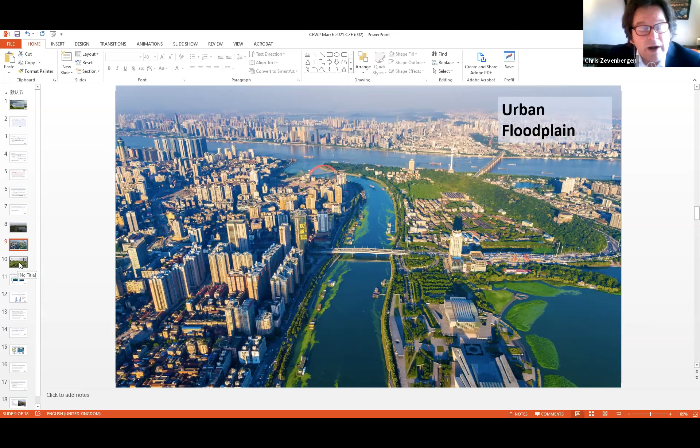One minute, Chris. Yes, please.

Now this is an example of New York, where we see that green infrastructure and blending gray systems will lead to a significant reduction of cost. What you can see here, the 2.9 billion dollars is the investment in the gray systems. When we want to expand the capacity, which is needed in New York, there are two options: either we expand using gray systems, or we expand using green systems.

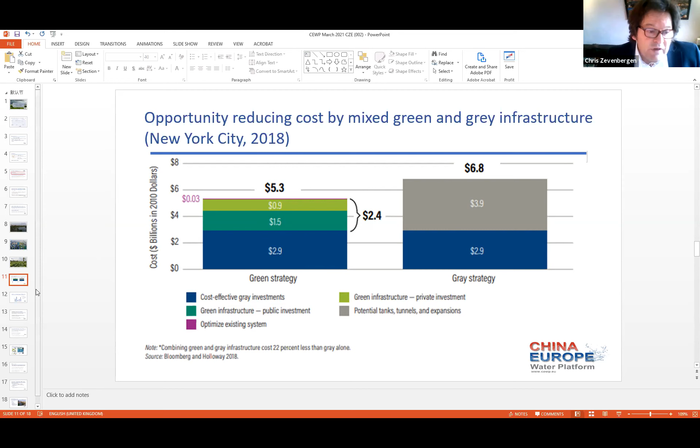What was the result of this cost-benefit analysis? That those green systems are really less expensive than the gray system. This offers an opportunity for the private sector to get involved, and that is what New York is currently doing.

Now, in our CECoSC project, we asked our cities—Beijing, Turku, Gothenburg, Copenhagen, Amsterdam—to give a scoring on their experience with public-private financing. What came out of these interviews and this scoring is that our cities have limited experience in public-private partnerships. They see that it is gaining ground, and they see also that they have an increasing ability, but are not there yet, to value green infrastructure, which is considered a critical factor in public-private finance.

Now, what are the lessons we can see so far from the projects in Europe, but also in China? We need to develop a business case with a very compelling story where we capture the benefits, including the softer benefits, which is of course a challenge. In order to do so, we need to engage the stakeholders, as mentioned several times—we have to align those interests, and we have to identify those interests.

But what is also important is that we also see other policy domains emerging, like health and biodiversity. Now, these domains should be connected to what we call Sponge City. So the Sponge City objectives need to be expanded and more comprehensive than strictly focusing on the water system. And finally, there is an opportunity to link carbon neutrality and mobility, which are emerging themes as well, to nature-based solutions. So there are a lot of opportunities.